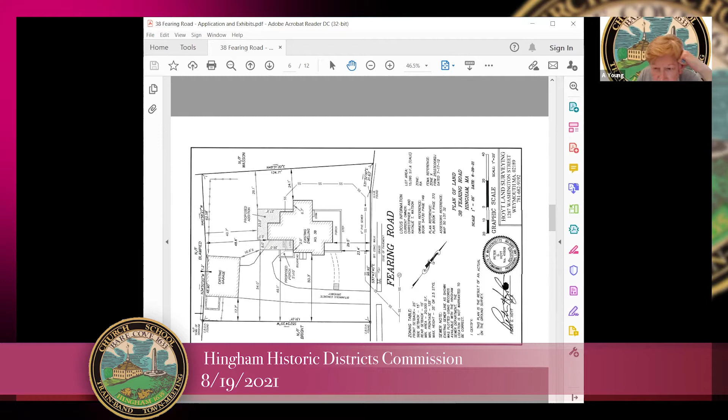Do we have John back? John just let us know that his internet dropped out momentarily. He's working on dialing in, I believe. Okay, all right. All these technical difficulties. All right, so I'm not so sure, correct me if I'm wrong, anybody.

Here's the roof plan, existing. This is to be removed, we know that back portion, and the proposed on this side. Yeah, exactly. Okay, so this is what the end result will look like, Al Kearney's sketch.

All right, Mr. Chairman. Yes, take it away. Is John back or? I don't think so. But that's all right, we'll just have to get going. We have our owner present, so that's okay.

Chris or Natalie, have there been any changes since we saw this on July 15th? I'm sorry, I think I was muted. There have been no changes to the plans or the drawings as shown on the screen since July 15th. I know there are a few items raised at the last meeting that I believe John addressed, or tried to address to the best of his ability, at the site visit on Saturday. So I'm not sure if there's anything still pertinent in the eyes of the board, but what you see here is still the most current drawings that we have. Okay, so are there any abutters who have any comments or questions?

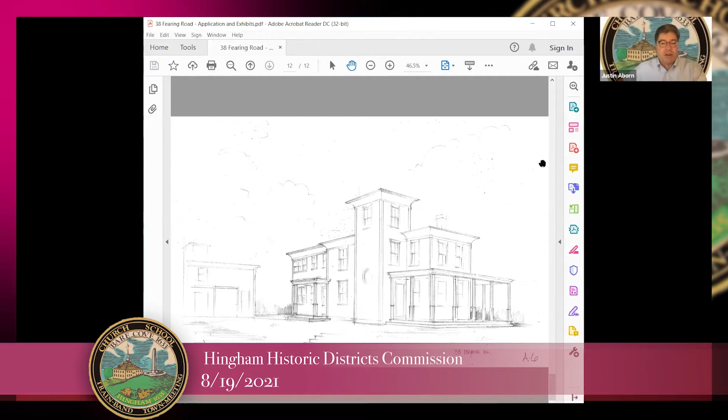Andrea, could we show A3 on the screen? Sure, upper right corner of A3. There it is. Yeah, the upper right corner. Okay, there's two long doors and an exterior chimney, which we had talked about.

Is it? So on that elevation, I think one of the things that makes those doors stand out currently on the supplied plans is that Alan had, for some reason unbeknownst to me, not drawn any grill pattern in those doors. So they look like long vertical lines on that side with no grills in them.

And where the rest of the house is 2 over 2, he's got the windows on the left-hand side being a little bit higher than the door. I think he did that on purpose to give it some separation with the pediments, and you'll notice there's no grand pediments over the door. All the other windows have pediments and they're kind of grand.

But in the keeping of a real Italianate house, the pediments are somewhat mundane. Actually, all the trim is somewhat mundane. It does have the curved overhangs, but it doesn't have any bracketry anywhere on the house, and that was kind of indicative to an Italianate.

So I think if we drew some grills in there, they'd look a lot less modern and more in keeping with the style of the house, where we could divide it straight down the center with a grill, then divide that left and right into equal panes, making them a little more window-like in nature. And then the fireplace there.

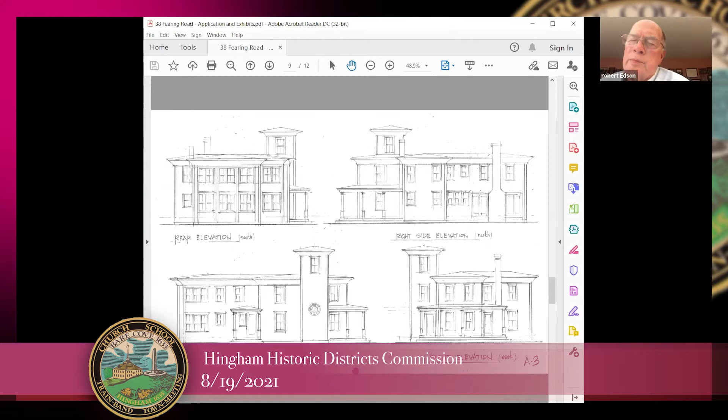Well, the tower is a stairway, right? Correct, yes. And what's at the top? Sort of an observation room of some sort? Yeah, exactly. So that's what leads me to believe whoever built this had some travels, because it's not a widow's walk - there's no ocean view.

And it is a curved staircase all the way up. It's quite elegant, quite beautiful, but there's not even a bench. I don't think the square footage up there is over 6 by 6 after you take a big chunk out for the stairway.

So I think it was just strictly there as a nod. It's not like a book nook - there's no benches up there, no beds, really nothing. I think someone just had it that this is what they wanted, and they came to Hingham and built it in 1865.

And my hat's off to them, because they were cutting edge at that point. And the roof material is what? Is it asphalt? It is. It's a rolled asphalt product.

It does need to be repaired. I think we were contemplating using a black rubber product. I don't know if there's any of the elevations you can see, but it would definitely have to be either a Bituthene, a rubber roof, or rolled asphalt.

And honestly, I haven't even seen rolled asphalt for sale in 30 years. So I think rubber isn't even economical, but it's kind of the only real go-to at this point.

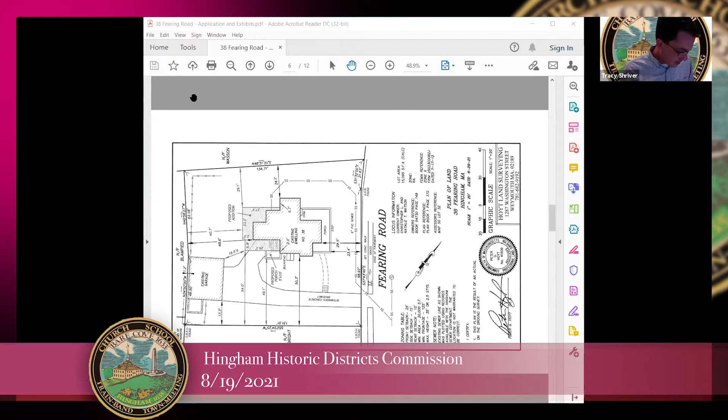So with that, we will move to 219 Main Street. And John, I don't know if you're presenting. I haven't seen, Chris. I think Sean has joined us. Sean, are you there? I am, Andrea, I'm here also. Okay, John was probably going to speak first, if I'm not mistaken. Yeah, my apologies, thank you Ms. Young.

I just wanted to make sure with the indulgence that Sean's here. Good evening, Mr. Chairman, fellow commission members, and Ms. Young. My name for the record is Attorney John Danahy, and I represent both Jim and Mary Catherine Mamry with respect to their application before your board.

I want to thank the board members who were able to come on Saturday to do a site visit and look at the new proposed plan. Sean had handed out those revisions, both of the site plan and the profile of the house, for the board members to look at. We didn't have any questions answered because of the timing, more or less for the forum this evening.

I just wanted to clarify for the record, because I did watch the hearing from July, that the board members and commission members understand that the Mamrys bought this project from Jim Magner. They did not alter or change anything that wasn't already pre-approved by not only this board but also previous boards. I know there was discussion about a plan from August 2019.

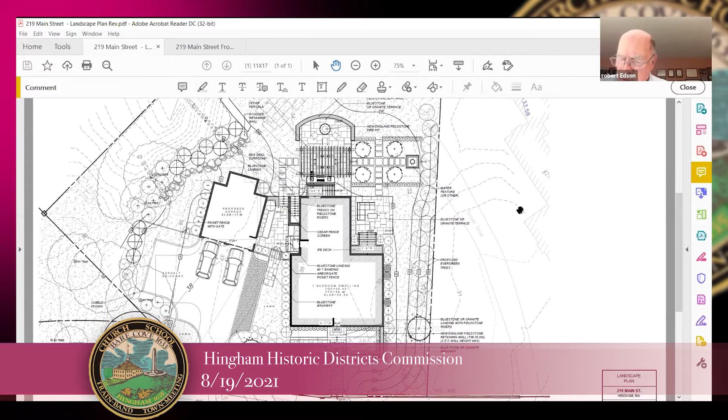Thank you. Is there a railing going up the front steps? We would technically have to have a railing on that second set of steps. There's 4 risers there, so we would be required to have a railing. While you've got a way to get in from the side, the town would probably require us to have a railing there. If we do that, it would just be very simple black wrought iron, flat bar stock, like would be very typical in the area.

Sean, could I ask something? Yes, back to the front area again. Sure, could you tell me...

I've seen the little broken up granite wall that looks like it's been there for a million years. It sort of stops at the left, lines up with the left corner of the house, and then disappears. So you're going to add height to that? Is that what you're saying? Oh no, not really.

I think there wouldn't be much on that, although there may have to be a little bit, and it varies in height as it goes toward downhill toward lower Main Street. So it gets a little bit taller. We may need to augment that a little bit and try to still keep it at about the height it is right around the corner of the property.

Do you think we could get chunks of stone that look about like what's there now? I think that's the capstone that's on there. Yeah, it's exactly what we try to do. We could either call it granite chunk or granite slab. It's kind of a unique piece of stone, right? So we would look for something to match, and that's what we would go for.

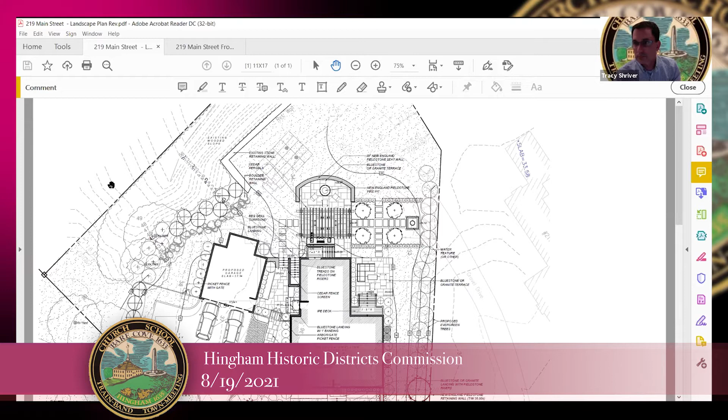Thank you, Carol. So my question, Sean, was just regarding the front retaining wall. I'm wondering if there are any other ideas you guys considered for that. I think one of my thoughts is that because the grade of the house is a little higher than we anticipated, the mass of it is of concern and we're just trying to reduce that.

So I wondered if any other thought had been given to the front entry. One possibility might be having the access from the driveway not be on the retaining wall level, but in front of the retaining wall. I didn't know if that would preclude even the need for the retaining wall. So if you could talk to that a little, that would be great.

Yeah, one of the things we did do is certainly look at every combination of resolutions when you're looking spatially at how to handle a situation you're kind of given. Right now, the situation is we've got about a little under 6 feet of grade change that we're trying to make up between the sidewalk and the finished floor of the house.

And so we know that we have to come down about 1.75 feet — about 21 inches, 7-inch risers from the house — to get below safely and, by code, below the top of foundation. But at that point, we're still substantially above the sidewalk.

So one of the things we think about with this is when we extend a stone retaining wall, a plinth essentially — one that's not large either, about hip height or below, which is very common up and down Main Street and all over the historic district. We did share some photos of those too at the site visit on Saturday.

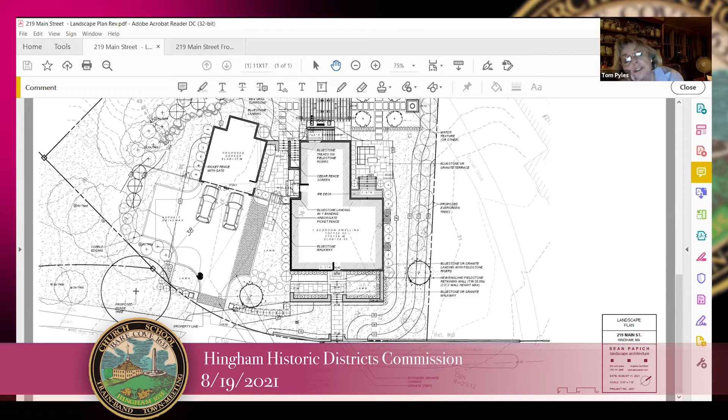I think the concern is the density, how it's going to feel visually as you're going down the hill. So I'd love to hear from the other members too on their feelings on that cobble apron area. Right, it is the streetscape that we're most concerned with. There's very little green area around the streetscape.

And while we're on streetscape, when you drive down Main Street and this house appears on the left, right beyond it are two charming houses, Dr. Eldridge's house, the big white one, and the little cobbler's house in the back, Wheelwright's house, the stone, very unique. And I'm looking at something that looks to me like 13 proposed evergreen trees.

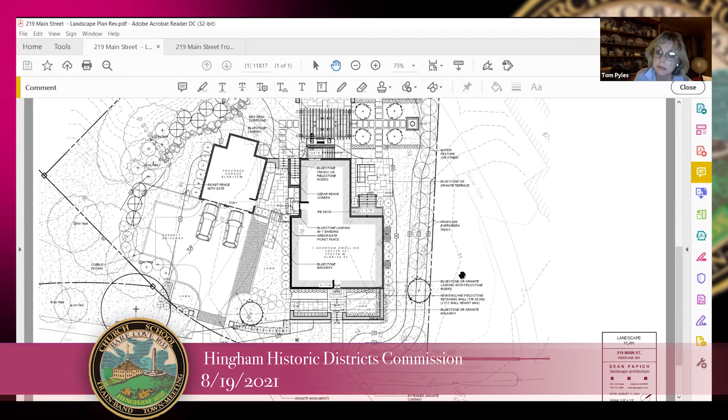Sean, why would you want trees there instead of a hedge of some kind? I think the intent is to just get some screening along the side and rear of the property, the way that it's exposed on that side. I mean, that's one way to handle it. An arborvitae or something that wouldn't, tree says to me it could be a maple, big. No, we weren't intending to. No, we were intending to do evergreen trees and or shrubs. It could be any combination thereof.

Usually at this point, we haven't finalized every plant selection when we're working on a project that comes before you. We're usually focusing more heavily on the hardscape treatment. Usually the final planting plan is not your purview. Right. Usually what it is, we would certainly give you a feel for where we're moving with it. So there'll be some evergreen trees. There would likely be some shrubs, but we're just not there yet, and we aren't intended to be there yet. I hear you, going through it. But screening is the intent, is what it is. But we wouldn't have it keeping those larger pieces to the back or to the sides.

No, but to your point, I think we could take a look at that because I'm looking at some photographs of it. And as you come down the street, certainly some form of shrubbery or some lower vegetation so that it doesn't cover up the cobblestone of the house that's right next to it. That's a good point. It's a unique structure.

May I, Mr. Chairman, may I just intervene here? I think what Carol is asking, and we do have this in our guidelines, is that we really don't want to obscure a historic property in any way. So I think that is the concern that Carol might be expressing here.

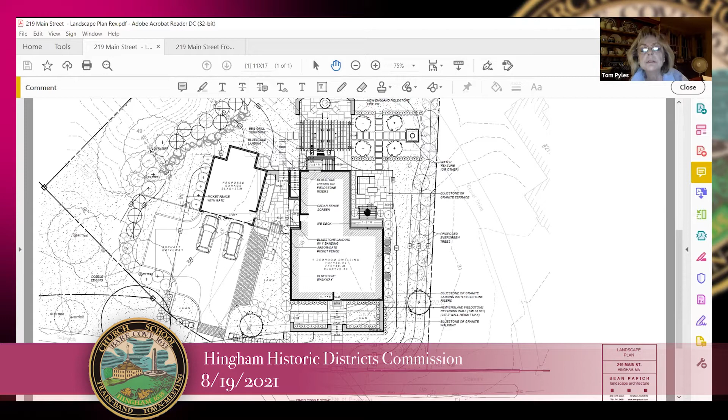Sean, what is this structure here? Let me see, I'm trying to look at - I don't see the cursor you've got there. Sorry, it's my - actually it's an Ipe deck, that's a porch that comes off that side of the house.

Okay, so I think that's something - to Justin's point, it would be helpful to know the height of that. Is there a way into the house from that deck? Yeah, those are steps - it's just a simple Ipe porch and steps down.

I think, to Justin's point, it's hard to visualize all this planting and the deck and the terracing, because if there's nothing there, it's totally wide open and there's never been anything there. So I do think having a visual - from the south looking north, and from the north looking south - would be really useful. That gives us a sense of what's in there. Yeah, I agree, Justin - from the south looking north.

Because that whole area is totally exposed in the back and on the side—those windows, the air conditioners, everything is exposed out there right now. So it's hard to visualize it with plantings and whatnot. Okay, all right.

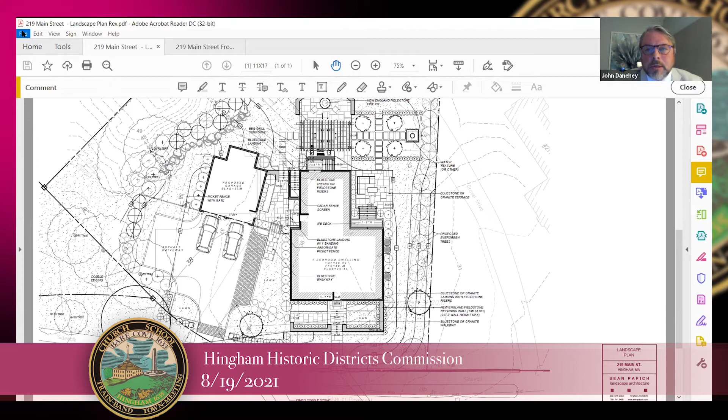Now, I understand that's on the condition. I want to see it, and I appreciate that. I think it's fair, I just kind of scratch my head going, you know, you snow blow it, you plow it, stones are going to go all over the place. Just kind of curious. Maybe Ms. Young, you and I can have a discussion next week, that would be helpful. Sure. Thank you.

Let me just make a comment that I mentioned this to Sean. What the commission envisioned was a very, very simple house, and the stone driveway was part of that. So that's all I can say right now.

I wonder if we could have the plan in front of us at the next meeting? Sure, that would be very helpful.

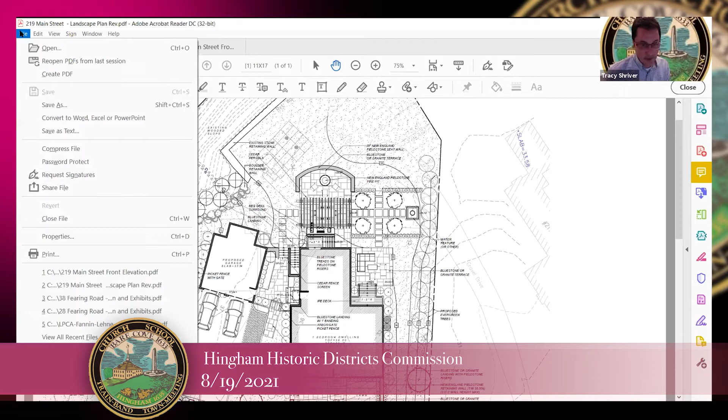And then if there's any additional thoughts on the granite versus bluestone, taking into account maybe what Mr. Healy had said. Just so I'm clear, what exactly Mr. Healy mentioned about the drainage, which obviously we can't pour water onto the street, it has to go, the law of water is it has to go naturally and flow the right way. We can't put it directly. There was a question because the site plan says bluestone or granite.

Got that? Catherine noted kind of a personal preference for bluestone. Mr. Healy noted that there's an existing granite retaining wall, and maybe there's a nod to that historical feature on the site with how stone's used elsewhere.

I just wanted to find out, you mentioned the retaining wall, and my understanding is that's a stone wall, but I'll confirm that for the board, I'll take pictures of it. It is, it's all granite retaining wall that has been there for obviously a very, very long time, about 100 years actually. We will consider, in terms of the materials we're using, the materials on the proposed walls that we're considering for the front of the house also.

I'm not saying either has to be granite or bluestone. There were certainly a few instances, such as these proposed evergreen trees or the granite versus bluestone, where we had a short conversation, knowing that final selections happen closer to install.

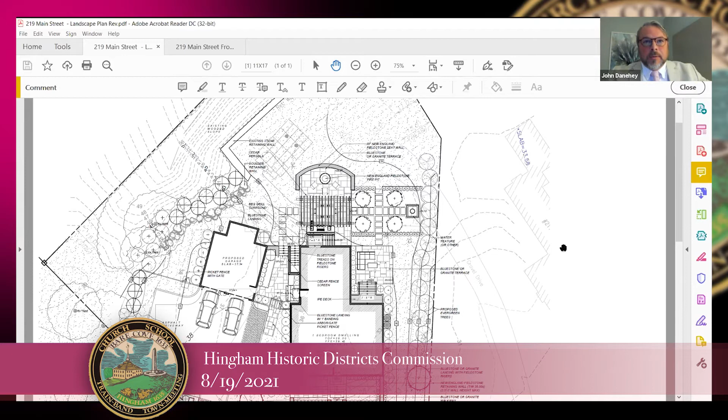If I may just interject, because I know you've got a busy schedule — Ms. Young, is it something I can sign electronically, or do you need me to sign it in person? I think you can sign it electronically. Sean, I'm down in South Carolina dropping my daughter off at school, and I appreciate your indulgence because I'm listening to music outside the hotel window and it's driving me insane. But I'll sign that electronically, or if you need me to, I'll come in and sign it officially too. That's great, thank you.

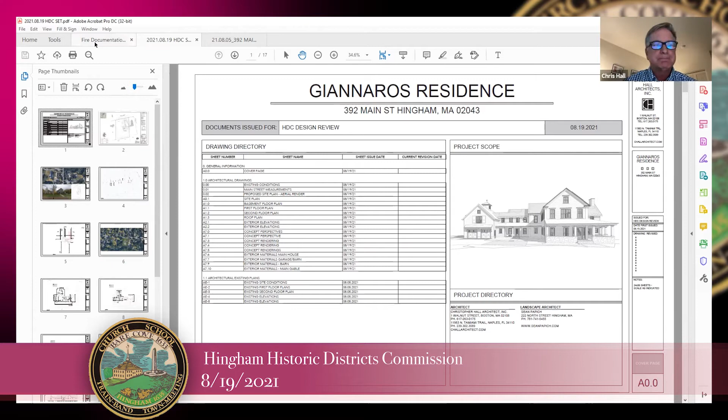This house experienced a fire on December 15th, 2020. The house was a total loss.

It received a certificate of hardship from the HDC back on April 29th.

Outside, as you drive by, which I'm sure you've done a million times, it doesn't nearly look as bad as the inside. The inside is completely destroyed and very sad.

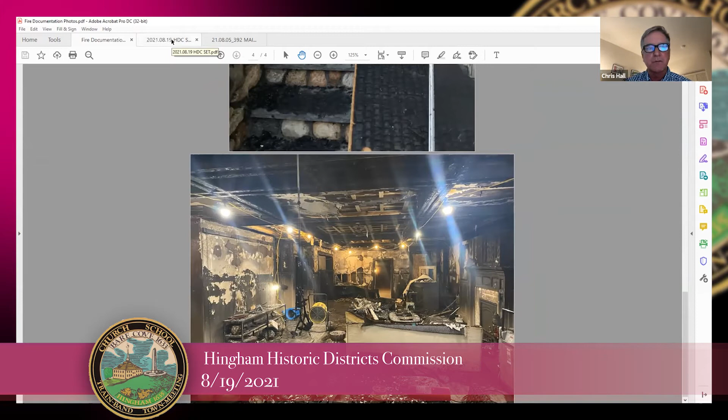I was hired 4 months ago to design a house for the Giannaros family. I was asked to design a house that retained the character of the 1861 house, which they loved, and at the same time address some of the issues that house had, in designing a house that would fit a little more comfortably on the site and take a little better advantage of the beautiful lot. I was fortunate to present the project informally on July 15th to the board and received some great feedback, the majority of which we've addressed and responded to.

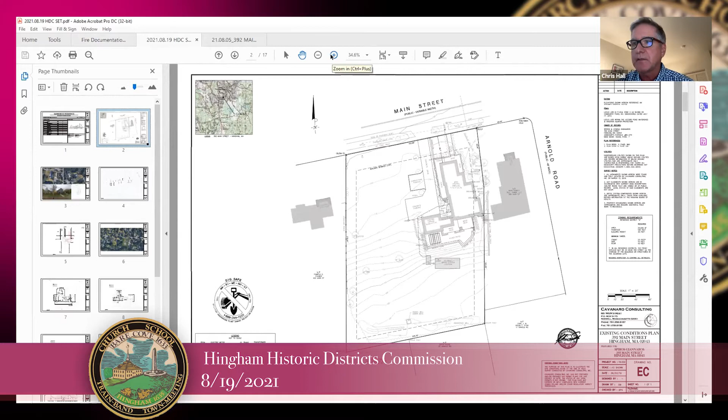So I'd like to go through our drawing set in its entirety. I'll move through quickly. This is the existing site plan. It shows you that the house is justified to the eastern property line - actually, it's 1 foot 4 inches away from the church house property line that it shares.

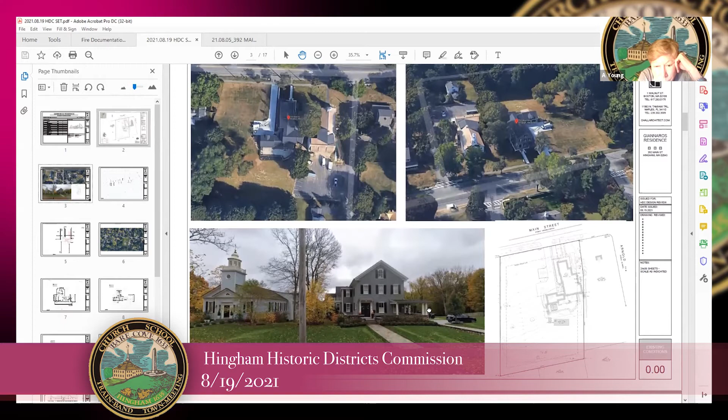The next pictures just show it again, its proximity to the church house. That's a telephone pole in the middle - that's not two different pictures. Very close, kind of an awkward juxtaposition, which is just the nature of how it evolved.

The new house we're proposing - here's a locus drawing showing you the proximity of the houses to Main Street up and down, including 392 Main Street right there.

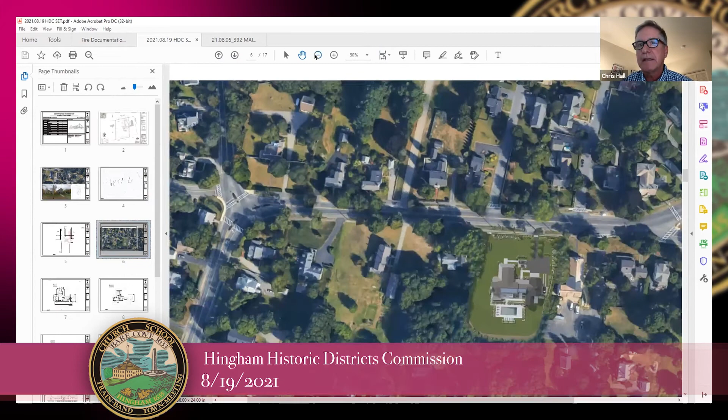The new house we're proposing is a bit of a hybrid in that it is intended to reference quite strongly the 1861 house with a main projecting gable and porch, semi-wraparound porch. It is located more centrally to the lot. The pink or red you see is an outline of the existing house, and the dark lines represent the proposed residence. This drawing starts to show that the original house had a strong north-south axis, and this house has an east-west axis with a projection of the main gable towards the street to allow that prominent feature to still exist.

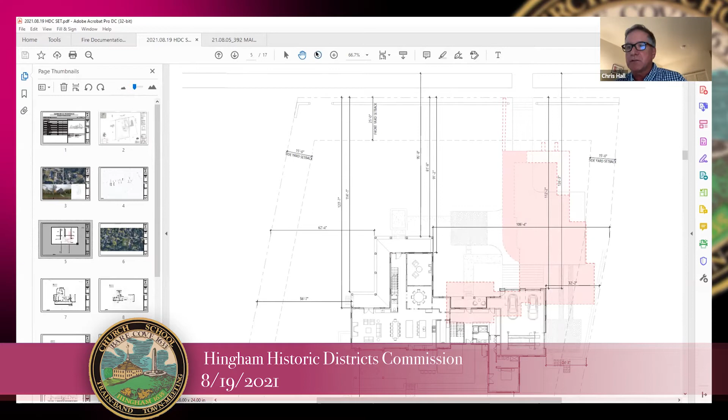From the overall Google Map site plan, we superimposed our 3D model onto it, so you can see the house with different shades of roof, which depict different materials, and how it sits on the site.

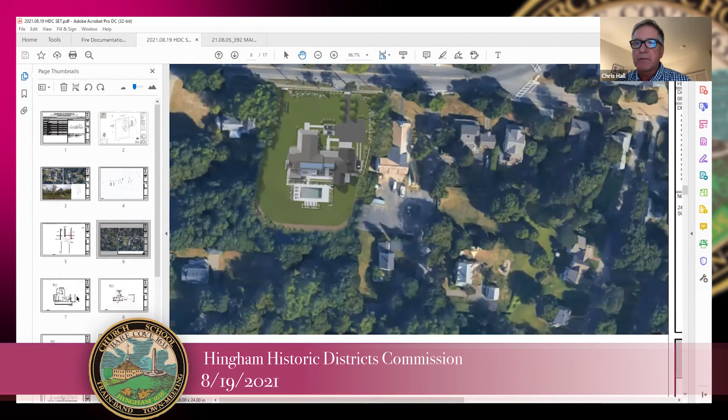The floor plans I'll go through quickly. It's a 5-bedroom house. On the first floor plan, the front door addresses Main Street. The front gable has a library and dining room, then you turn and come into the main portion of the house, which takes advantage of a wonderful backyard, which they didn't experience all that much with their existing house. So that's one of the benefits, I suppose, of the new residence and what's happened.

There is a family room, dining room, kitchen, pantry, and then a connecting back staircase to a 2-car garage. Some board members may recall that we originally had a 3-car side-loaded garage/barn.

After our meeting, we really felt like that pushed the house way far to the west. The sunsets and the side yard where the kids play was a huge component of their previous house and is a huge component of the proposed house, and we got too close on the west side, the left side. So pulling it back also meant we would need significant, long, tall, and expensive retaining walls on the east side to the church house, to the Wilsons.

So we moved it back over and have a 2-car garage now facing front and a small 3rd-car bay with a tight radius in the back. The second floor plan just shows 4 bedrooms with an office over the barn.

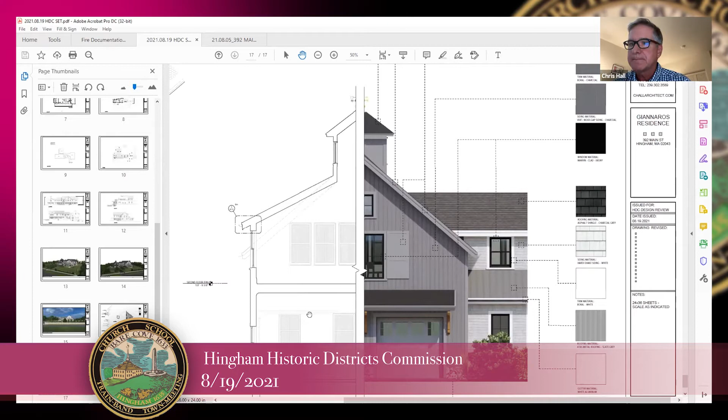And I'd like to briefly talk, maybe not briefly, but I'll try to be brief, about the little bit of a shift that occurred from our previous meeting. We received a couple of comments which were basically dimensional.

One board member said that they thought that the house was set too far back from the street and that the majority of houses along the street were a little bit closer. We moved the house up 20 feet. So the existing house had 52, we had 101, now we're at 81 feet back from the street, which does put it in the ballpark of neighboring houses.

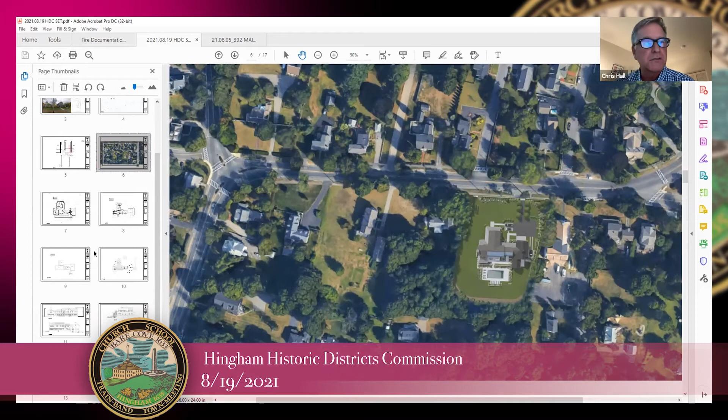Another comment dimensionally was that the front of the barn was a little bit too close to the face of the gable of the main house. We pushed it back 15 feet to give some differentiation and some subordinacy - I'm not sure that's a word - have the barn be a little more subordinate to the main gable.

And then the remaining comments had to do with exterior massing and materials. And there were a couple of comments that I think together resonated with me, I must say, in an interesting way. I thought about, there was one comment that said, oh, well, even though the existing house doesn't have a lot of detail, it had more detail than the house I previously showed.

And one board member said it looks sort of like a transitional farmhouse or contemporary farmhouse, and it doesn't, it could use a little breaking up, and it seems kind of big. And it struck me that that's not what I wanted.

To me, these houses that are in a historic district, they tell a story. They tell a story of the passage of time. They tell a story of functionality. None of these houses are flies caught in amber. They morph and they change as people use them.

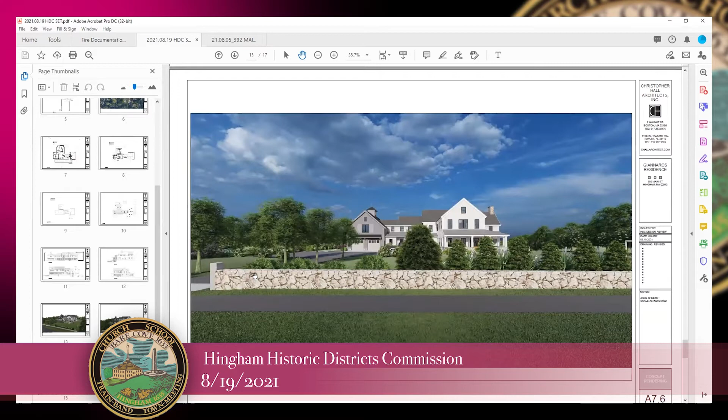Well, I was one of those who felt that the barn was overwhelming the house. It almost looked like a barn with a house attached to it. And I appreciate what you've done, and I like it very, very much now. I think it's a very good design. Thank you.

Real quick, Chris, I know Sean's on the phone. I don't know, is this the driveway that's presented, or is that going to come in a landscaping package later? Because I have a feeling there's going to be comments on the driveway.

So, to the best of our ability, we implemented Sean's plan on this model, and Bryce can fly around it. Keeping in mind there are some limits to what our model can do from a landscaping standpoint. They're not the exact bushes and exact size, but yes, we have the exact driveway configuration, pathway to the front door, pathway to the back door. So the driveway, this layout is part of this application. Yes, it is. Okay, all right.

If there's no more clarifying questions, I'll ask if there's any neighbors or abutters who would like to speak.

Chris, or is it Ryan? I'm sorry, can you go back to the plans? Not in our packet, but it showed all the setbacks of the neighboring homes as well. I thought that was very useful. So you're at 90 - I know you said you moved it 20 feet, but you're 80-ish feet to the porch and 90-ish feet to the front of the house. And some of the neighbors are where? I thought I saw everything from like 60, 70 to 80, maybe one around the corner was closer to 90.

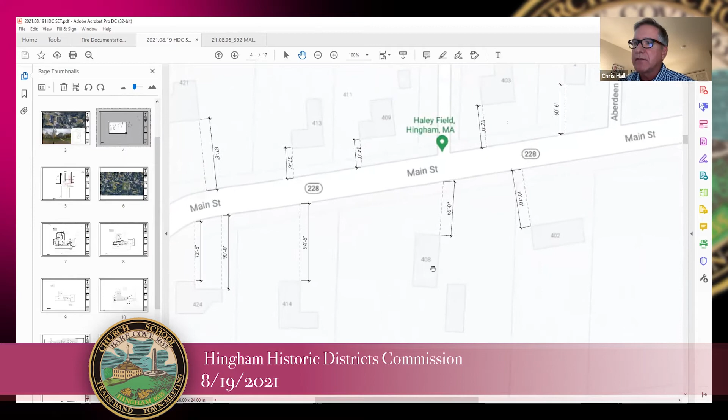Yeah, I thought this was pretty useful. It's one of those things where, back in the day, a horse carriage didn't make much noise, right? But we know what Main Street can be. So we want to respect that proximity, but at the same time there are bedrooms facing that, and there's a library, so we felt like moving it back could possibly close the gap enough so that it was not an issue.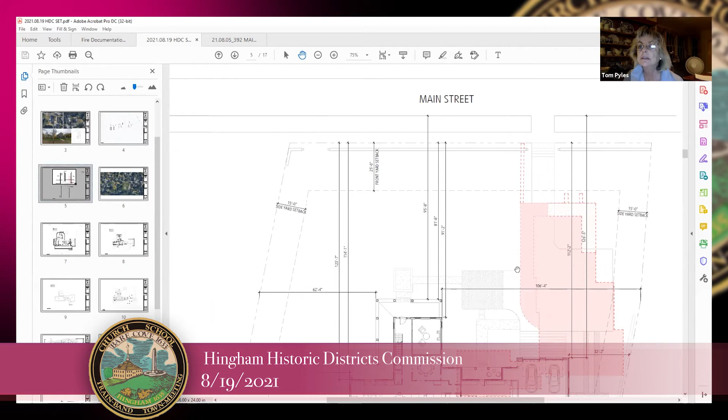Did you say it was 81 to the street or to the sidewalk? It's to the sidewalk, basically, it's the property line. From the porch or from the house? 81 to the porch, yeah, so the house is back another 8 feet beyond that.

Do you think we could go the other direction on Main Street? Because actually, I think this is the last house on this street in the historic district, and so if we go the other way, it might be useful.

So, or Mr. Chairman, are we right? Are we opening up to comments at this point? Yes.

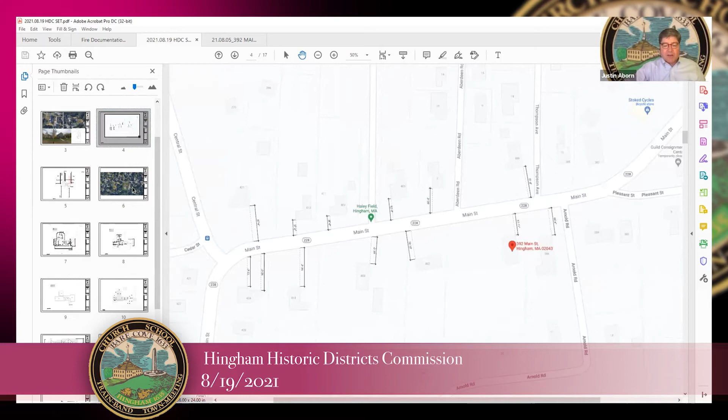As far as setback goes, I think for this particular property and this particular design, I think that 20 feet change made a great deal of difference. I think that particular property really can handle the position and the design, and it really has a very grand appeal. I think it's very appropriate, and I would support this.

I'll go ahead, Jen. I agree with Justin. I think that the changes Chris made to the plans from the last version really soften and give a little gravitas to the property. It's a little more character.

I wondered just quickly, and I don't know if you have this information off the top of your head, the height of the original house compared to this house. I'd be curious to know that.

Should I just do all my little comments in a row and then we can address them? One thing I noticed also is there's quite a bit of driveway right in the front of the house, a little car park that looks like it's directly in front of maybe a mudroom area, and I'm wondering if that could be reduced.

My last comment is about the cupola on the barn. We all love cupolas, they're great and make everyone really happy, but I'm wondering if this one is a little oversized and feeling a little bit more modern and contemporary. By making it a little lower and smaller, it lets the main mass of the house shine a little bit more and doesn't compete quite so much in heft and also in detail. That's my comments.

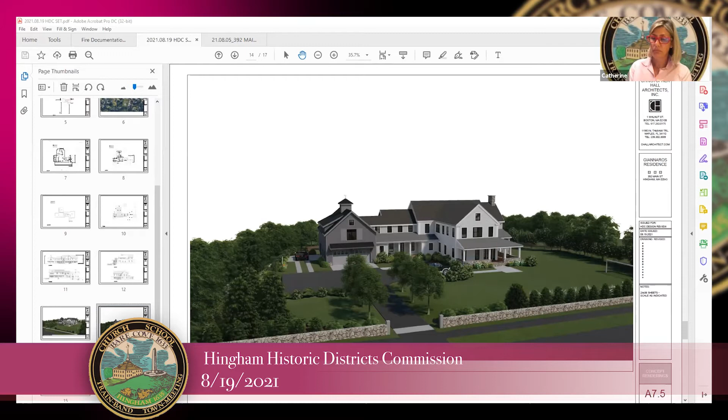The existing house is 33 feet off the first floor, 38 off the average lot grade. To answer your question, the proposed is actually lower: 32 feet off the existing grade, 31 off the first floor plane.

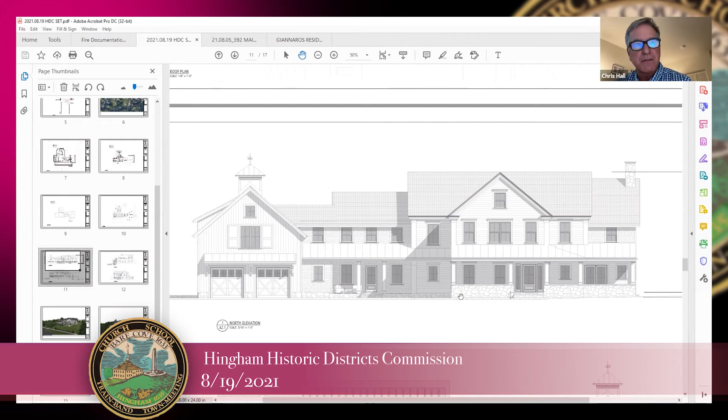With regard to the cupola, I don't think it's too big. Respectfully responding to that, I guess I have a knee-jerk Home Depot cupola phobia, in that a lot of these cupolas are undersized. They were intended for ventilation, and the bigger they are, the more ventilation there is. But from a 3D perspective on the ground, cupolas get smaller and smaller, so I didn't want this to appear to be a small appendage on top. I wanted it to appear viable and recognizable, so I spent a lot of time on its proportion.

I don't think it seems that modern. In elevation that might appear the case, but in true real life, three-dimensionally, I think it fits the scale of the barn.

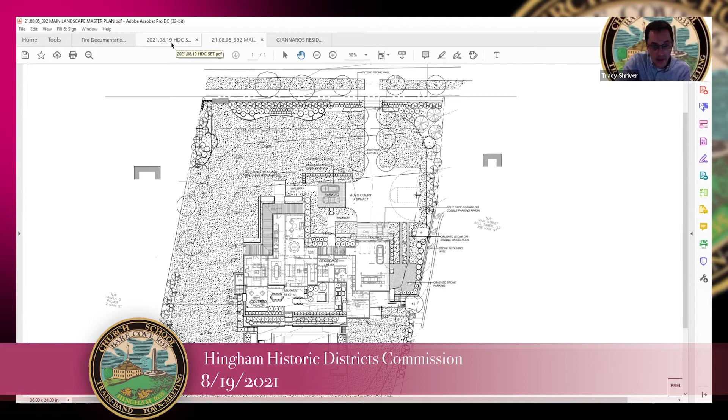I was afraid this was going to happen, and I think if we could, because we haven't heard from Michael or anyone yet, if we can focus on the structure, I feel like everyone will be happy if we can push this house along, and if we have to come back to the driveway, we can take that up separately. That's why I asked if the driveway was part of the application, because I was afraid this was going to happen. But I agree with the comments, and I think everyone really wants to make sure the house moves forward. So Michael or Carol, I'm not trying to cut anyone off. That just sounds like an excellent intervention.

Yeah, I'm happy to provide comments. I think I appreciate where you've gone with this, and I appreciate the thoughtful solutions to our comments from the last meeting. I think this is an appropriate solution to what you have.

Unfortunately, our packet doesn't have what I thought was a really great sheet, maybe we can get that submitted - it's the one with the materials and the detail on it. I'd like to ask a little bit more about the specific materials you're proposing, not only for the siding but for the windows, the window types. Could you talk a bit more specifically about that? I'm assuming the siding and all the trim you're proposing is wood.

Yeah, so with the exception of the vertical nickel gap, which is Boral, a fly ash material impervious to insects and rot - it's natural, fly ash compacted - everything is wood. The windows are Marvin; they're wood windows, they have a clad extrusion, aluminum extrusion on them. But all the trim would be cedar or redwood, and the shingles are white cedar shingles, pre-dipped and painted.

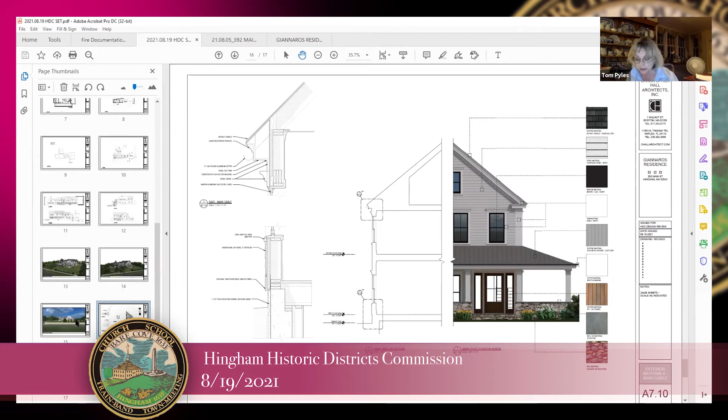Catherine, I might add that within our big guidebook Andrea gave us, the 500 pages, there's a whole section called Guidelines for New Construction and Additions in Hingham's Historic Districts, pretty specific about a lot of stuff, including siting, what materials can be used, how it should fit in with the neighborhood. It's all there. It helps to read it.

I wonder if I might ask a question about the right side of the house where the porch wraps around. We're seeing two doors coming out from the dining room facing Main Street. Are they, that's not a sliding door obviously, would it be glass, or are they French doors? What are they? Maybe Bryce can go to the elevation for that. Yep, those doors right there, on A2.1, they're French doors, glass, divided lights. Yes.

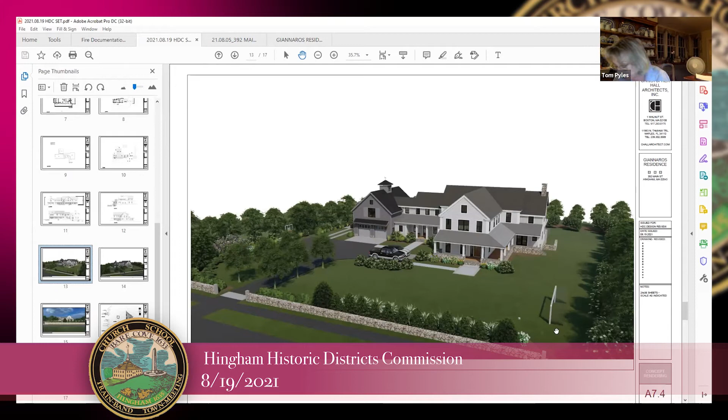Tried to keep the front of the house very quiet from a fenestration standpoint, and not have there be anything that drew your attention. Well, there's 12 windows that show across the front, if I'm looking at it right. 1, 2, 3, 4, 5, 6, 7, 8, 9, 10, 11 maybe, on that one second floor level.

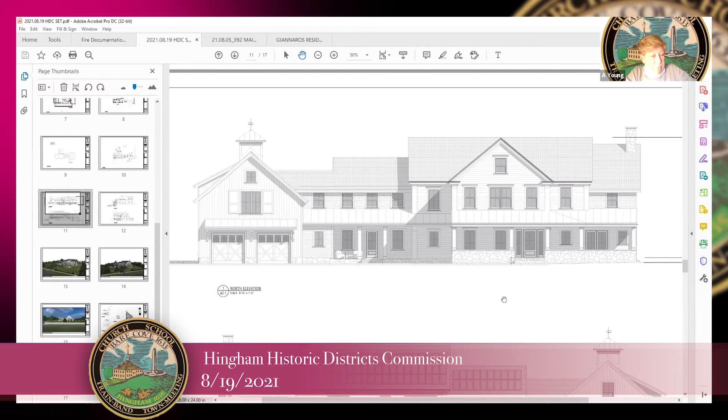Mr. Chairman, I think your comment before was very helpful. I wonder if we could agree to approve enough so they can begin moving along, but the details such as a window schedule, and some other information on materials. I think there's some questions on materials, on the window schedule, on the parking plan. I agree with what Carol and Catherine were saying. I wasn't trying to cut them off, but I do think it would be great if we could make a motion on the structure itself, given its location and perimeter, allow them to start the building department approval process and the demo and excavation, and we can address a few of these other details later, when they're ready.

Does anyone want to make a motion? I'll try.

I'd like to make a motion for a certificate of appropriateness for 392 Main Street. It's a new 6,760 square foot single family wood frame residence with attached barn garage, as seen in plans dated... what are the dates? Anyone help me here? 8/5/21. That's the date, August 5th. We submitted the date on the plans drawing, the plan set. Oh, 8/5/21, thank you.

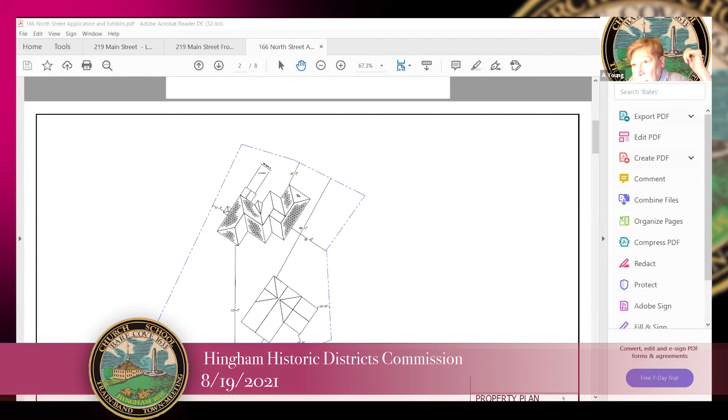Okay, so everybody can see? Yes. Okay good, so you just tell me where you want me to go with this, okay? Sure, if you could just, you can leave it right there.

That's just a mock-up of where the active shingles will be on the main house. The secondary structure to the bottom right, again, will not have any. Currently the house has asphalt shingles on it. The solar roof tiles are darker, more of a black color than a light gray. They're textured to mimic asphalt shingles. It's pretty straightforward, there's not much else with this.

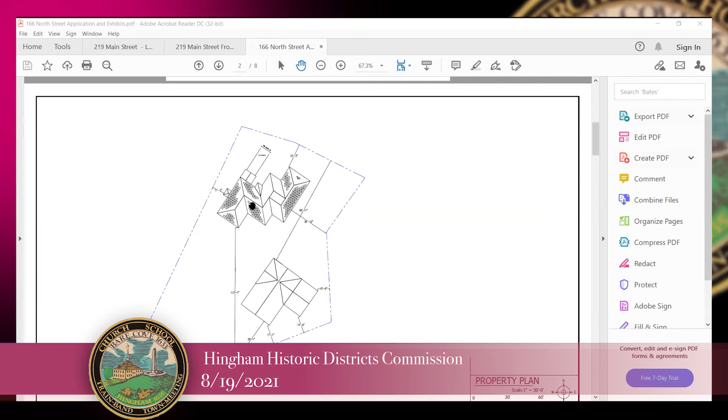I do have a quick question - you're saying the roof plan is showing the active shingles, so are they in a field of typical asphalt shingles, or are they all going to look cohesive? Just some are active, some are not - I should have clarified that. Some are active, the ones you see with the little squares are the active ones, and the blank spaces will have the same tiles, they'll just be dummy tiles. Okay, it'll cover the entire roof. Gotcha.

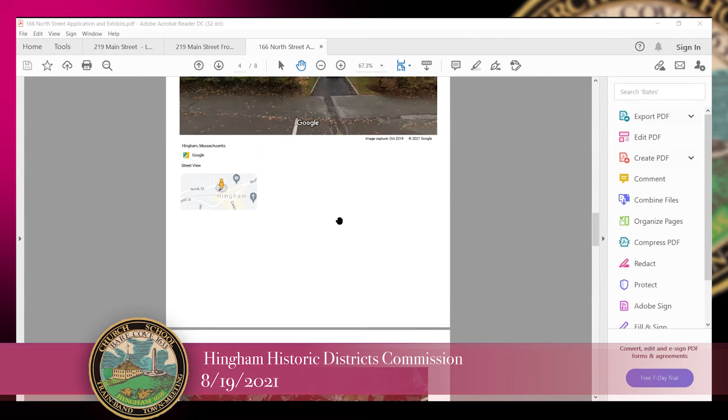And is there anything here you would like to see? If you could scroll more towards the bottom, there's the view from North Street - that's the existing house. Yes, if you continue to scroll on one of the spec sheets, there's several pictures. This is a house I had approved in the Hanover Historical District to give you an idea of what the shingles look like. We also have had several homes approved in the Old Kings Highway Historical District on Cape Cod.

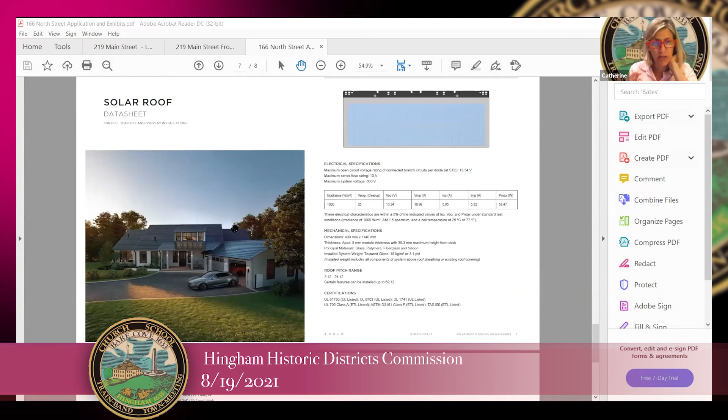So I'm still not quite understanding - so the active tiles are the ones drawn in with the squares, and then the rest are the same product but inactive? Right, so for production purposes, the little squares are the active shingles that are active for PV solar, and the rest of the roof where there aren't little squares would just be inactive tiles, but they're all the same. Gotcha, so it's gonna look cohesive. Right.

And what was the address for that house in Hanover, is that available? I believe it was 76 Tucker Road. Yeah, it's set back - right, it is a little further back. And whereas this is a newer product, there aren't as many homes yet with this, so I kind of had to dig around to find the closest one I could.

Is that one in Hanover the same product, the same color, the same tile? Yes, it is. So I don't know—did the commission members have an opportunity to drive by?

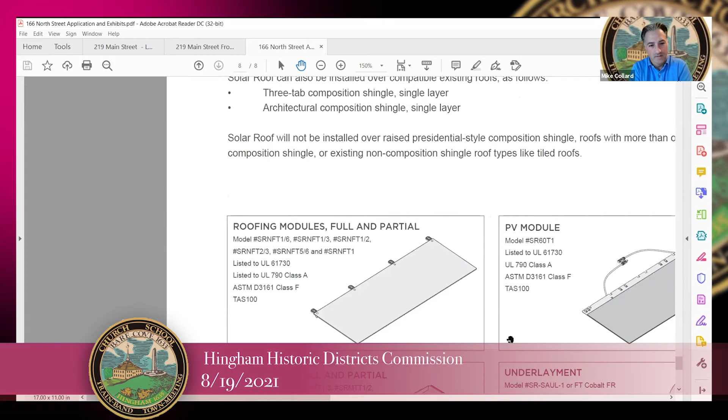I did drive by that house. These are not solar panels as described—solar panels we typically haven't approved. This is a completely different product, and it's intriguing to me as a way to solve the problem of solar panels while keeping with the times and creating opportunities for homeowners.

The one thing I noticed, and I'd encourage commission members to see it in person, is that it's kind of shiny—you can actually see it a bit in this photo. The size looks like a larger metal shingle, which I think may be okay, but the challenge is it's shiny, and in person it shows a little more than this image does.

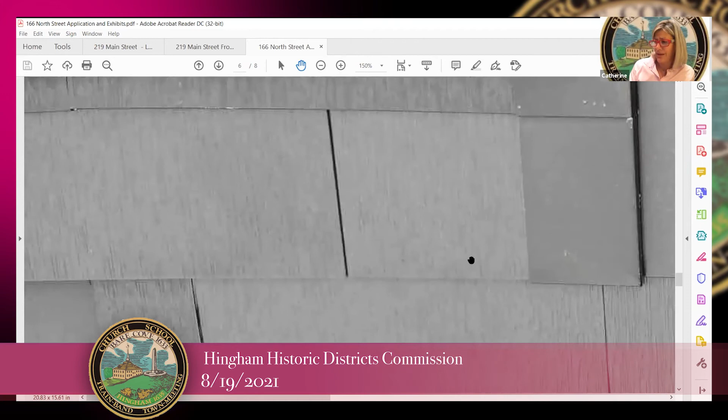Was there any discussion about whether the homeowner could achieve their energy goals by having these tiles just on the back of the house? Oh no, it's meant as a whole roof product—unfortunately we cannot have the front asphalt and the back solar. It wouldn't work; there's potential for leakage. There's no way to marry the two materials together at this time.

So going back to Mike's comment, they're all shiny—there's not more of a matte finish available, correct? This is what it is. They have a similar sheen to solar panels, a little less because they're textured. The best comparison is a brand new black asphalt roof right after it rained—I don't want to say glare, but there is a slight sheen to it.

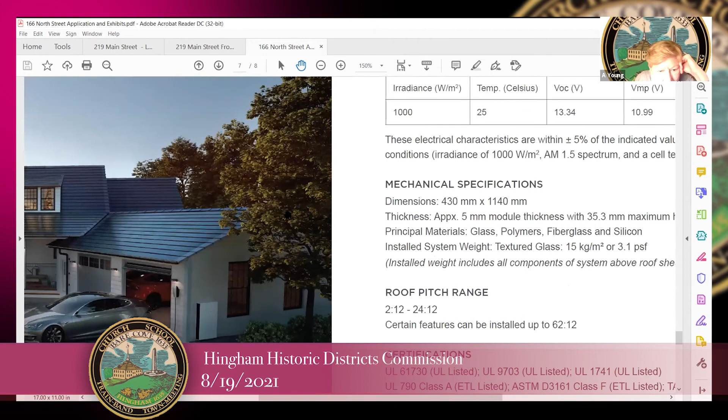What's the size of a single one? It's approximately 3 feet by 14 inches, I believe, off the top of my head.

Andrea, is this the first application we've had for using these? Yes. Do you know if the state has allowed them in any other historic districts? I think Lewis mentioned one approved in Cambridge and another—I've actually gotten one approved in Cambridge and in the Old Kings Highway Historical District on Cape Cod. Oh, good.

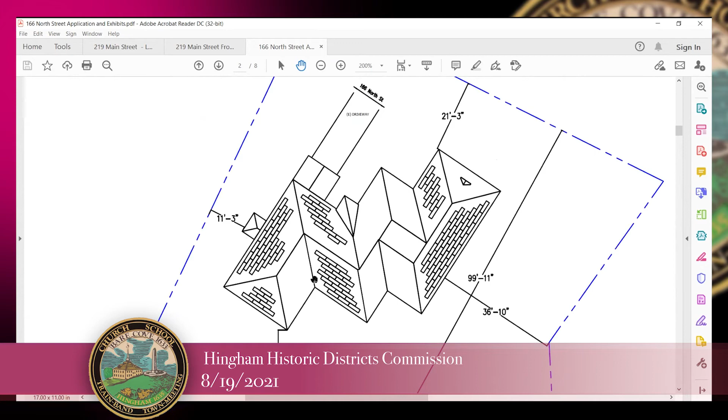What's the comparison between solar panels and these in terms of installation price, effectiveness, and how much they lower your electric bill over time—are these an improvement? Well, solar panels are cheaper, but there are a lot of factors—roof complexity, how many dormers, and so forth. These are very productive as far as solar power goes, and they also work as a roof; they're hail rated, with a warranty currently around 35 years. The return on investment for solar panels is usually about 6 or 7 years; for the solar roof it's probably a little longer right now, but it's designed to last a minimum of 30 to 35 years.

It appears they wouldn't show very much on this house to somebody walking by on the sidewalk since it's pretty high up. But I do worry we'd set a precedent, so the next person wants their whole roof done and it looks shiny—there's nothing you can do to unshine them, not at this time. It's unfortunate we have to do this via Zoom, as I have samples the commission could look at and judge better.

I would recommend going by the home in Hanover. I can find the addresses for the ones in Yarmouth and Cambridge, though those are a bit of a drive.

I just had a quick comment, a couple of quick questions. The other structure on the site plan—is that a garage apartment out back? It's a barn. So that's way farther back from the street than this main building.

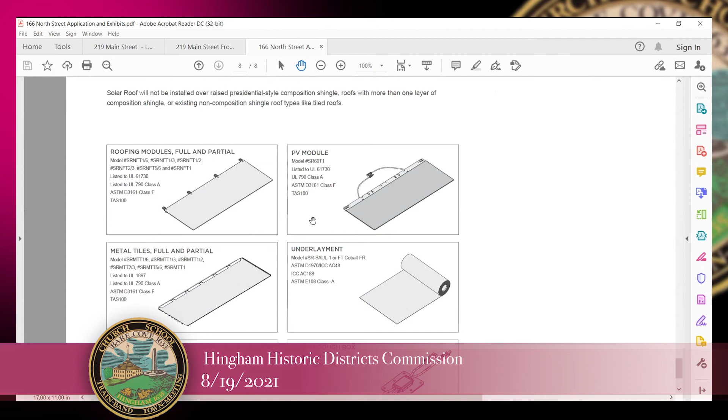Andrea, I think in the past when we've had new materials, we've had the opportunity to come over and check out a sample, like when we were looking at some manufactured trim products and windows. Would it be possible to get a peek at a sample of the shingles, or at least a board with them on it? Sure, I'm more than willing to bring it down to town hall anytime, though the company prefers that I not leave it there. So if there's a time everybody wanted to meet, I could gladly bring a sample with me. Sure, we could do that.

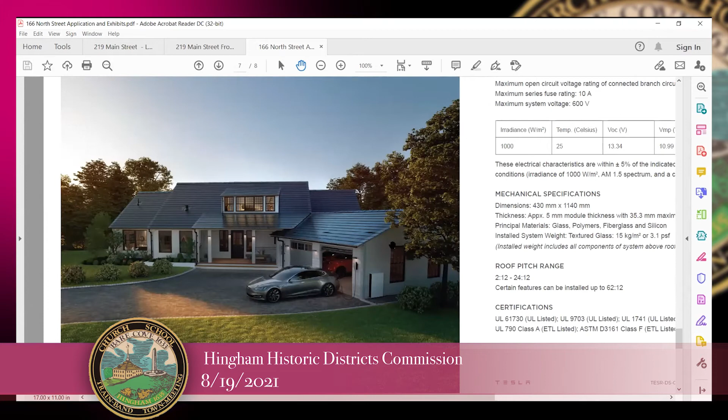What I was thinking is, I'm not hearing an absolute no from anybody - seems like there'd be a lot to take a look at, and I'd love to find a way to say yes. I think it'd be good to understand the size of the unit, because in that picture you scrolled by, that white box on the side - is that part of the charging? No, go back to where the car's in the driveway. That's actually a Tesla Powerwall. Yeah, I thought that was the battery storage.

I think we can set up a time to look at the product, and then at the next hearing, if we had an idea of where this unit was going and how big it was. And please understand, we can't use trees and fences to hide things.

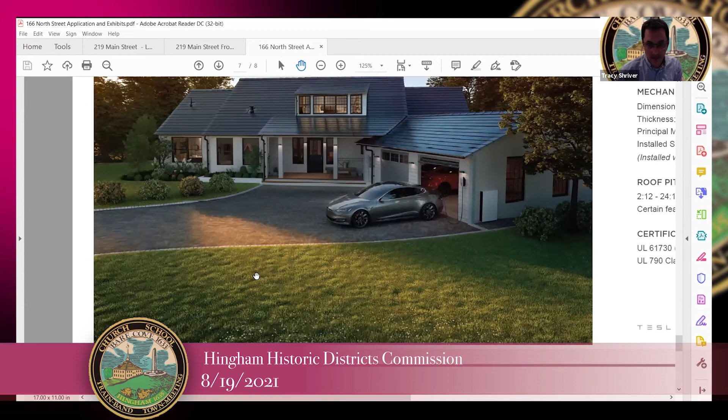So even though there's a giant shrub there today, it may not be there tomorrow. So I would have some good consideration of where that unit would be located.

Just to clarify, that unit you're seeing in this picture is the Tesla Powerwall battery. That's a lot bigger than the inverter. The inverter is approximately 6 inches in depth, 26 inches tall, and 16 inches wide, and it's white. So it's bigger than an electrical meter, but it does not protrude nearly as much.

Is it attached to the house? It would be attached to the house, yes. Oh, okay, sounds smaller than an air conditioning unit outside. Yeah, it almost looks like a little electrical panel. Actually, electrical panel is a good comparison, similar length and width. It would just protrude, like I said, 6 inches.

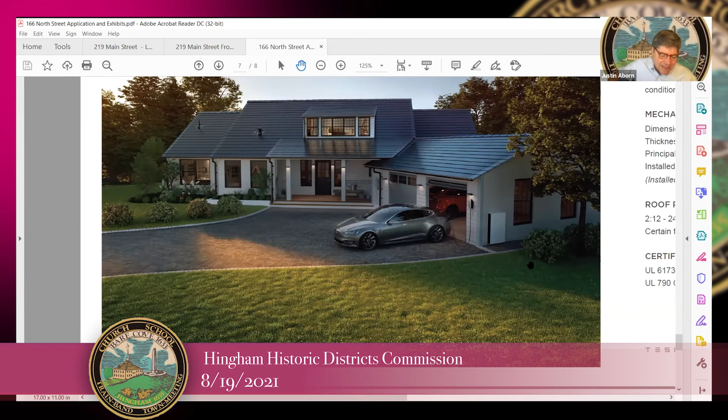What were those dimensions, 16 inches wide, 6 inches thick? 26 inches tall, 16 wide, 6 inches thick. Thank you.

I think we are curious to know more about the product and see it, have a sense of it. Would be happy to rendezvous at town hall to see it. Okay, all right, and I will set that up with you.

Okay, sounds good. I just wonder, how long is the install for this? How long does it take? Well, that's tough to say because it depends on the complexity of the roof, how many dormers, how many cuts we need to make, how many hips, how many valleys. A small cape, a day and a half, 2 days, and that's counting stripping the old roof off. So it's fairly quick.

I was just concerned because our next meeting is September the 16th, so I just wanted to make sure that if the commission decides to approve the product, it wasn't going to be too late to do something. Well, I know weather can be a concern, especially once we get past September. Obviously, the sooner the better, but again, it's up to the commission to approve it.

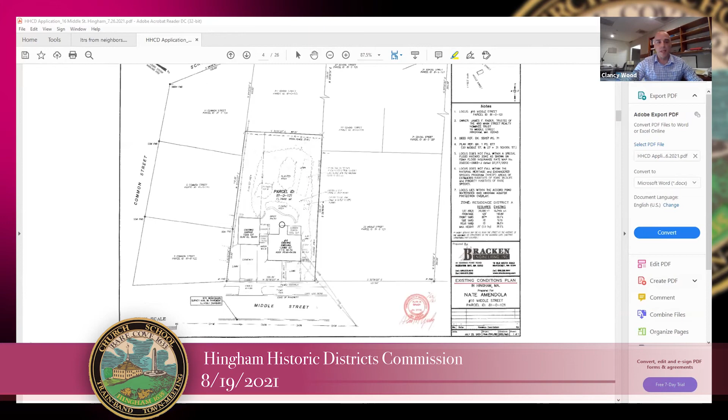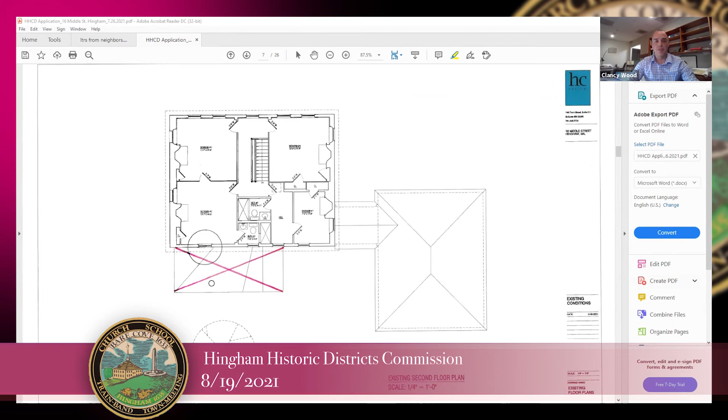So this is the existing first floor plan, and this is Middle Street up here. This is that kitchen bump out, a one-story kitchen bump out with a screen porch. The screen porch roof is starting to sag and the floor is starting to sag, so it's in a bit of disrepair. We're proposing to remove that, and then we'll get to the proposed plan. This is the second floor plan, again just showing this single story roof that we're proposing to remove.

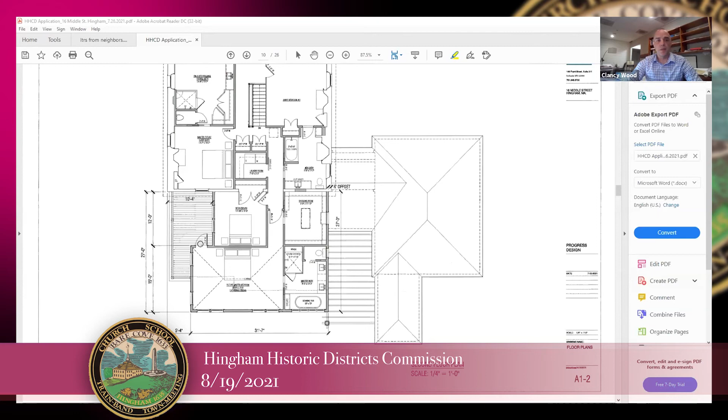And this area here would be a walkout roof deck over the sunroom below. But it's a perfect opportunity to really take advantage of what we're doing on the first floor, and just have this nice sitting area in the back. The backyard is quite private. So it's a second floor plan, roof plan.

We're proposing to hold the addition about 8 inches in from the existing back corner. And all the roof pitches would match the existing roof pitch, which is about 5 - I think there's a little bit of a sag to it in some areas, so it's somewhere between 5 and 6. And same with the garage.

The garage, all the roof pitches are the same, which is what we would propose for all the new structure as well. This is the new ridge, and it would sit below any of the existing ridges or hip lines. And all the soffits, eaves, and gutters would all align, especially on the new second floor here.

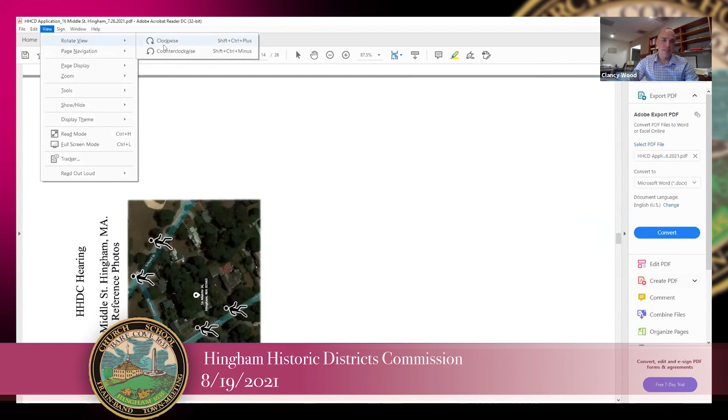Actually, I'm going to rotate the view real quick so we don't have to all turn our heads here. So this is the property, and this is the house right to the right of it, which again, the fronts of the houses are all pretty much in the same line. So as you come down Middle Street, you only get a small glimpse of this side here, but Clancy's thrown together this map with these little guys on it.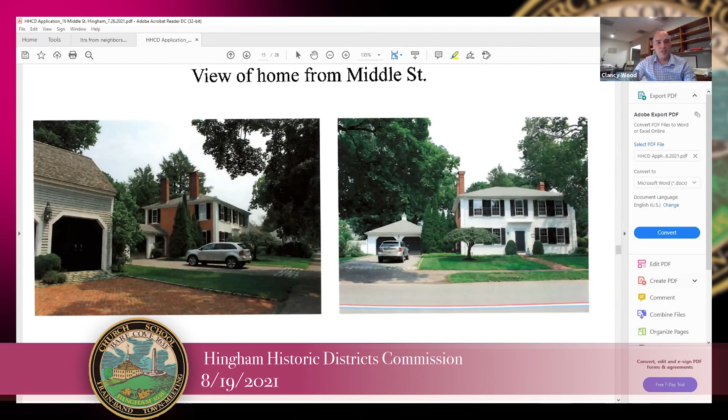So you can see how those correlate to the photos from the street. So view from Middle Street. Again, we're holding the addition about 10 3/4 inches off the corner to maintain the prominence of the existing house, and that brick really kind of shines. Then this is the left side of the house here. But again, the proximity of this garage really cuts the view a little bit as you come down Middle Street this way.

That's kind of the same photo, but this is the right side of the house. So this is the side that you would see the most of. But again, that brick really stands out.

Here's some nice views from Common Street. I think the house is back here somewhere behind all this shrubbery. That's a little bit of it peeking out here. So again, as you go around the neighborhood, it's pretty obscured. There it is again. So yeah, you can't see it very much from the back anyway.

All Marvin signature wood. The casing and the sill, the thickness of the sill and the depth of the sill, all of that would match. We would match the existing with all that.

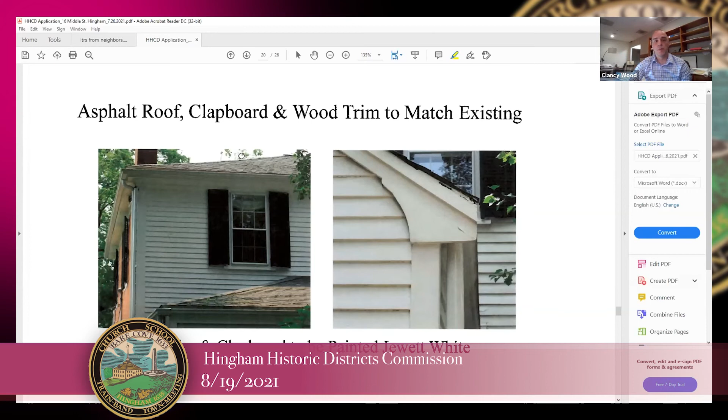The new trim and clapboard would be Jewett white, which is out of the historic paint colors. Any new doors would be painted black. Asphalt roof on the new addition to match the existing roof shingles. Clapboard same, would be wood, same exposure, so everything would match.

This is the pergola in the backyard, which, as I was saying, once you fill this in wouldn't be visible, but extending that more into the backyard as it grows with the addition. And there was some talk about trying to maintain some of these beautiful plantings that are back here, because I think they really love the atmosphere of this backyard, and trying to replicate that with new work that we do.

So this would be an example of the rail that we would use on top of the sunroom. Just a simple all wood, painted Jewett white to match.

On the front of the house, I think right now there's onion lights out there, which wouldn't be period accurate, I think, to federal style. So they want to replace the lanterns with these, which I think is much more appropriate. These would be on either side of the front door, and I think the garage as well.

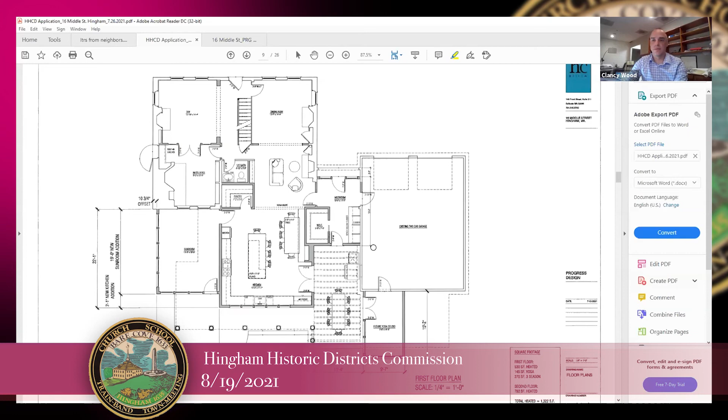Anyone else? For the rear windows on the second floor, I guess those are all going to be removed. What is their state now? Are they antique, or what is their current condition? Is there a plan to reuse them if they are antiques?

That's a good question. I think they are in the same condition as the windows in the front of the house. Whether or not they're able to be reused once they're pulled out is another question, but we can look into the condition they're in. I think they are original to the house. When you look at photos of the back of the house, the styles of some of the windows back there are different, and they differ from the windows on the front of the house.

So whether or not they're original to the house, or they were replaced at some time after that. How are those designated on the schedule you've given us? Can you point those out to us? I assume each of those rear windows on the second floor are on the schedule, and are these just the new windows? Because I see future dressing room, but there's not a listing of the current windows.

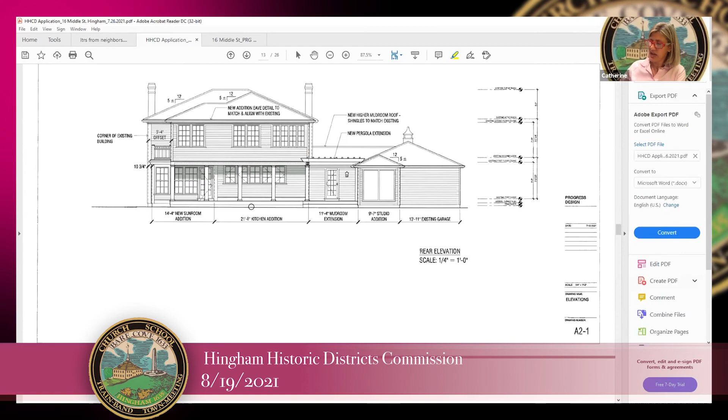Is there a view of the existing rear? Just how many windows will be affected? Because I think on the lower level they're all gone. Yeah, I think they're gone, they don't seem like original windows. Let me get to the second floor.

So this is the rear of the house now. So there would be this window, I think we're saving. Because on the second floor here, we jogged this in so we could save that window, so that one is staying, and it's these three that are being affected. You can see the grill patterns in all of these are different. So, little history lesson right there.

All the ones on the front of the house are all 6/6. This one is a 9/9, this one's 12/12, so where these ones came from, I'm not sure. But we're definitely saving this one, and then it would be these three that would be removed.

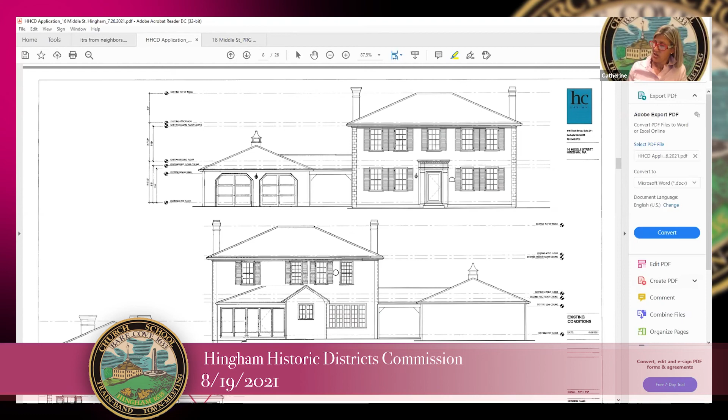Okay, and then my other question is, could you get the functionality and space you need without giving extra height to the mudroom roof? Say the lower pitch. Yeah, we could definitely do that. One thing we could do is on the roof plan, I could maintain that front pitch up until we hit the ridge, and then have a shallower pitch from there back to wherever we need it to go, if we really want to maintain the ridge height of that roof. So that's definitely an option.

Thank you. And if this, so right now, we wanted to maintain at least a 4 pitch here.

I think if we were to keep the ridge height where it is and extend this back, we might get into sort of a 3 pitch. It might start to get shallow enough where we'd need to think about a different roof surface.

And then I have one last thing. On the left side of the new addition, the garage side, I think you do have a little peek of view, as Michael was pointing out, where the top of the house will peek up beyond the garage as you're walking by. Is there a way to improve that big blank section of wall, maybe with a blank window, maybe a faux shuttered window, to add some symmetry and balance to that facade?

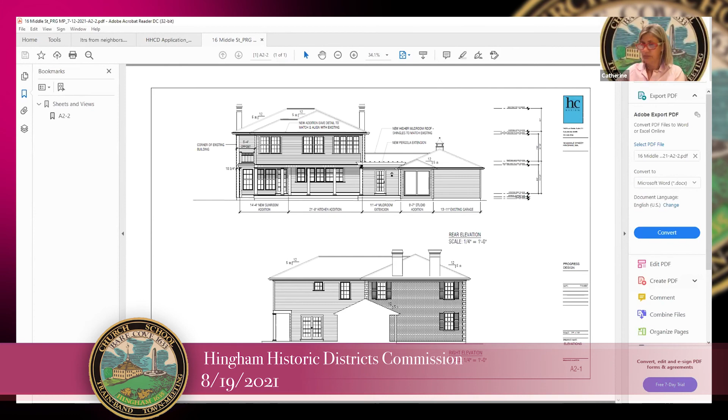Carol, Justin, any comments? Questions? No, seems pretty clear to me.

I'd like to say that coming down Middle Street, I know the red brick does stand out. I have red brick too, but you still are going to see this addition going on the back with a lot of windows and a railing up above and a column holding up what looks like the back of the second floor of the house.

Yep, I don't know what to say about it. Well, that column is sort of back behind this one-story sunroom, which is behind this. So I think it probably wouldn't be quite as visible, but...

A lot of federal buildings did have these sort of open rail balconies, so it is sort of keeping with the style. But yes, that column would probably be visible.

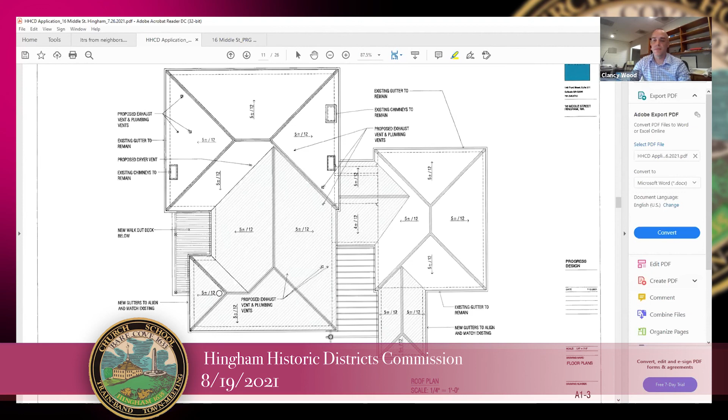Is there any way of getting the light you want in the sunroom without 5 windows lined up? It's so shocking next to the old house in the front. What is the age of this, by the way?

Are we 1800s? The house is built in 1805. And there is a sort of screen porch that's there now that extends to about here, which is all just screen, and it is in pretty rough shape.

So I know there's 5 windows. I think it would still be a pretty dramatic improvement to what's there now. But we can look at different window configurations as well. We can look at having 4 windows in there—so it doesn't have such a modern look.

Although, well, the windows would match the other windows as well, and I'm sure you guys have seen millions of elevations. From the elevations, it's tough to gauge in 3 dimensions how you would perceive the face of that, because you'd be seeing it at an angle, so it wouldn't appear as large as it does in elevation.

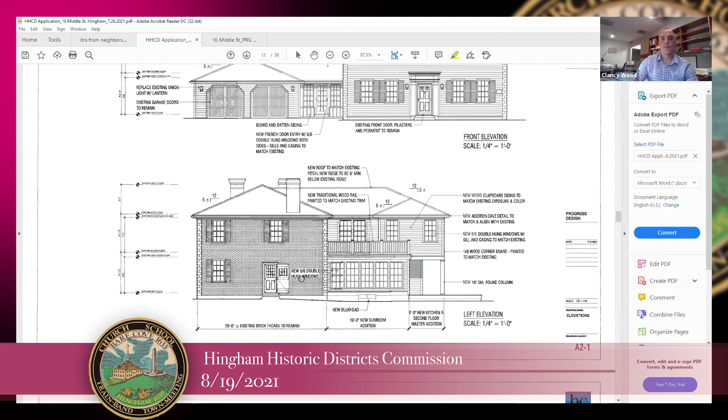I'm not crazy about closing in the connection between the barn, the garage, and the house. I think it changes the whole look of it - the barn and garage become sort of an extension of the house. It's not an 1800s garage, so connecting it doesn't make sense to me.

I'd like to see this old building preserved in view as much as possible.

Landry will schedule a site visit. We'll look at those windows, and we'll get the corners staked out. We can also look at potentially some symmetry on that left elevation in the back corner there. And maybe while we're there, we'll see some of the precedents on the street - some of the other sunrooms and the amount of glazing.

But that's the bulk of what I heard.

Go ahead, Carol. Notify the neighbors - can they come look at what's gonna happen during the site visit, or not? Of course they can, it's a public notice, right? Yeah, it's a public notice. Okay.

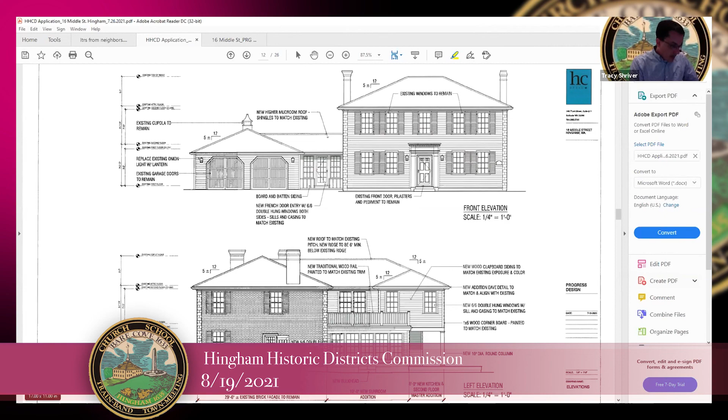You're on mute, Julie. I feel like we made Julie wait this summer too, like an hour. It's all right, take it easy.

I see in the photos the pool got started. The pool has started, probably not shockingly for you guys, but it's not going to be finished in time to go swimming this year.

But it's moving along. Let me see if I can share. I don't have my 8-year-old here, so I'm not as good at the Zoom. Can you guys see my screen? Good work, oh I did it. Can you see my cursor too? Yes, perfect, thank you.

There are a couple different angles - you guys all have these packets in front of you, right? And when we came in April to get the fence approved, I think you'll remember we kind of dealt with the left side of the house and the right side of the house.

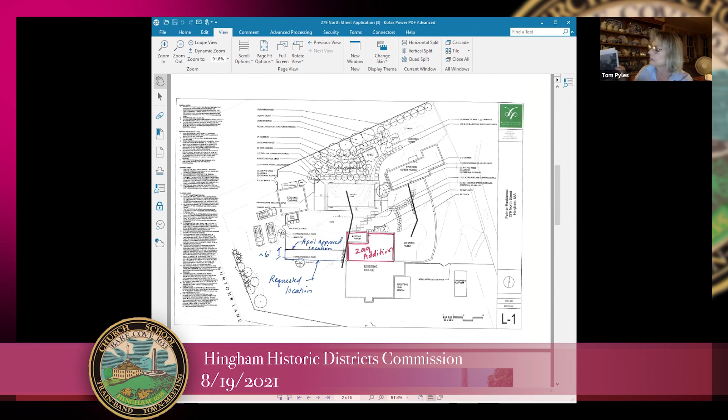I had an idea to add to that. I'd like to see the corner board exposed from the front, so a few inches back, that's a nice detail. That's the main historic home, be seen all the way down. Yeah, so reveal the trim board, the corner board, to be seen by the street.

There's a second. Carol seconds. All right, Carol, how do you vote? Aye. Catherine, how do you vote? Aye. Justin, how do you vote? Aye. Michael? Aye. And that's an aye for me. All right, thank you, Julie. Thanks team. Have a good night, everybody.